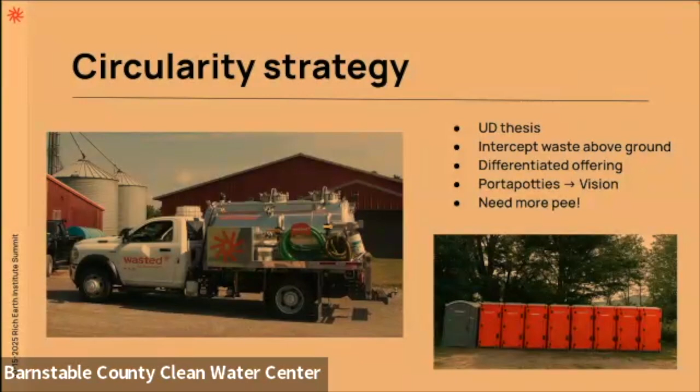We offer toilets that are greener and cleaner than our competitors. So folks choose Wasted because our toilets smell good and are clean, and also because of our mission. We have a sustainable toilet paper. It's bamboo-based, a biodegradable portable toilet additive, that's the blue goo, and we offer reduced carbon emissions due to the flat packing of our modular toilets. So we're scaling to collect pee, and we're now at the point where we need more pee. We're generating revenue from fertilizers, so we need more pee, and that's a great problem to have, which Rachel will speak to a bit more in her presentation.

So we collect most of our pee through these standing urinals in our portable toilets. This was just an idea last year, but it's now become a reality, and we've scaled our portable toilet urinals 5-fold with these new urinals. These are injection molded and they're modular. We can snap them into our existing porta potties with no other modifications, so that makes it very easy to adopt. And these have a one-way valve between the urinal bowl and the tank, preventing smell from flowing back up.

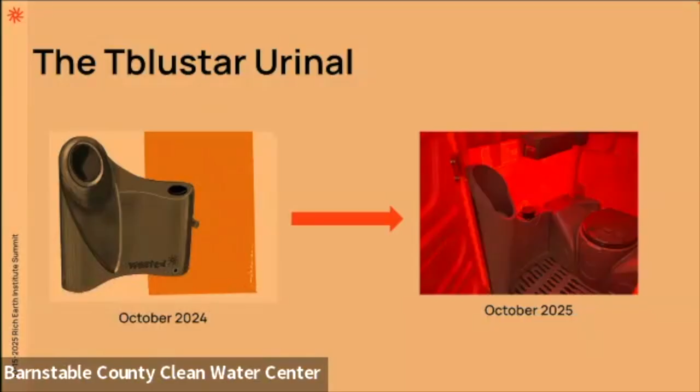And they have about a 7-gallon capacity, which allows us to collect pee over the course of 2 weeks without pumping out. We have previously measured that we collect about 3 gallons per porta potty pump out. So if that rate continues, we can collect 17,000 gallons of pee in Burlington next year and 100,000 gallons in Boston once we're allowed to begin collections in Boston.

So our standardized offering for permanent or semi-permanent fixtures is our donation station. And here we have some stations that were installed at Marino Park in Providence. So these toilets have a dry conveyor belt flush toilet right there. So it's waterless, and it's completely off-grid. It's solar powered. And the good thing about these toilets is that they collect from both standing and sitting peers, whereas the urinals in our porta potties are a bit of a compromise.

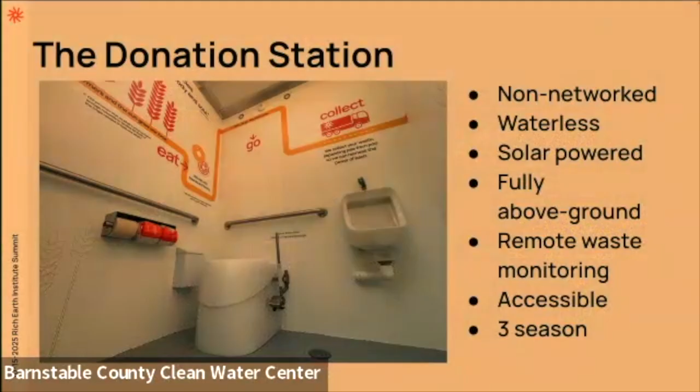This toilet on the ground collects from anyone who stands or sits, no matter how you use the bathroom. This is also, of course, accessible. It's accessible by a wheelchair, and I'd just like to highlight some engineering here because it was a unique challenge. This toilet being accessible by a wheelchair and being built fully above ground had to have some pretty interesting plumbing. Since you all know pee flows downhill, there was nowhere for it to go beneath the toilet. We didn't have much room for a big tank.

So the solution we arrived at was to pipe the pee first into this small tank, then pump it up into a larger tank using a solar-powered pump. This large tank has a 100-gallon capacity, and it has an ultrasonic sensor in the top, so we can measure the volume of waste at any time and only send out our trucks once it needs to be pumped. So with this big tank and the remote monitoring, we're able to more efficiently pump out these toilets as opposed to porta potties, which need to be pumped out every week.

We offer that same conveyor belt toilet for custom settings. If a customer has their own structure or wants their own structure built, we can work with them to install a conveyor belt toilet there. And the benefit here is usually increased collection capacity as well, because more often these pipe to a 250-gallon tote, so we only need to pump that out once or twice a year.

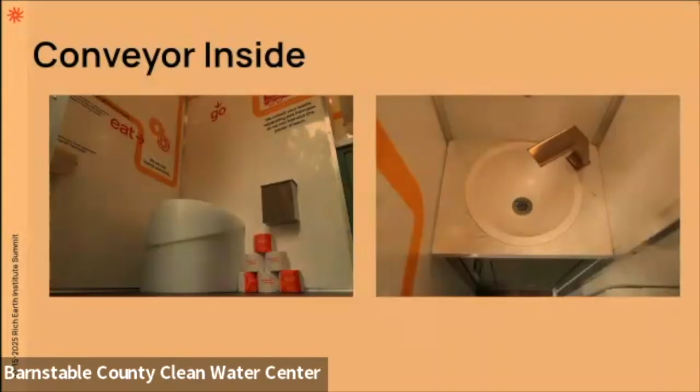So our last method of urine collection is the VIP trailer, and this is a high-end restroom trailer for events like weddings and concerts. This again has the dry conveyor belt toilet and running water, so it's great for settings where people might not want to use a portable toilet.

So all of these toilets are in service of our vision, which is to change the way people think about waste, and we lean into that from a few angles. We have educational graphics in our porta potties and our structures, really letting customers know that we do recover resources from their waste. We also provide customers with impact reports, letting them know the resources saved or diverted by choosing Wasted. And we offer a product with a story.

I didn't really get into it, but we sell WeBloom, which is a liquid nitrogen fertilizer made from the urine we collect. So customers can then buy back their nutrients as WeBloom to use in their gardens, which I think is a great demonstration of circularity. So customers love going with Wasted. They love not only our higher end service and offering, but also our environmental mission. So we're proving that, yes, people outside of our peecycling circle can see urine as a resource.

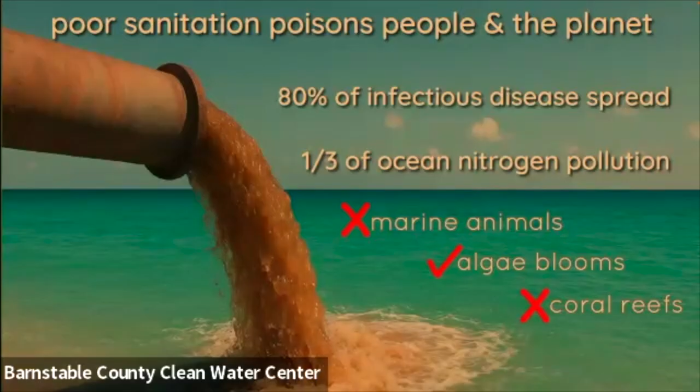So poor sanitation poisons people and the planet, contributing to 80% of infectious disease spread and 1/3 of nitrogen pollution of our coastal waters. And that nitrogen pollution in our oceans contributes to mass die-offs of marine life, fuels huge toxic algae blooms like you are all aware of, and also smothers 2/3 of coral reefs. The other thing that maybe is a hidden problem is that the degradation of this untreated sewage into our environment emits the worst greenhouse gases. So essentially, that includes methane and nitrous oxide, which are respectively 30 and 300 times worse than carbon dioxide.

So to give you sort of what the future looks like, by 2030, more than 2/3 of us are going to be living in urban or coastal communities. These are densely populated communities, but there isn't going to be a sufficient amount of infrastructure expansion, and we're facing increasing water scarcity. So the reality is that if we look at 2030, 2 billion people living in urban areas, that's 1/3 of city dwellers, are going to have a non-sewered toilet option.

So the reality is, and I think most of you know this, is that sewered sanitation is just not going to be a feasible option for most of the non-sewered communities in the world. And so as a result, it's not a huge surprise that $19 billion per year gets spent on non-sewered sanitation, but none of the current options do a good job of saving our oceans, cleaning our oceans, or curbing greenhouse gas emissions, climate change.

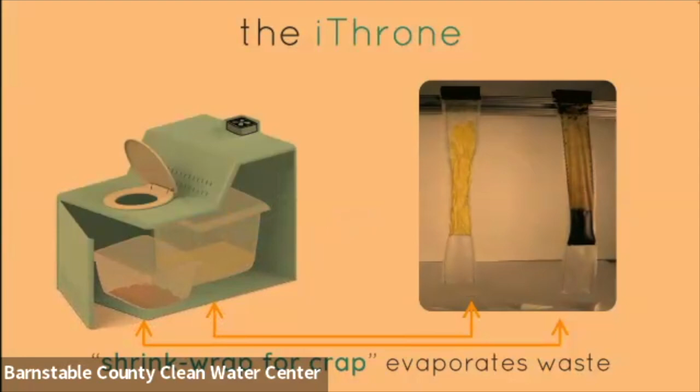And then these bags will quickly soak up the liquid water content of the waste, and by pulling it through the membrane, convert that liquid water into pure molecular water vapor. So essentially, that's like evaporating waste, but without needing heat to do so. So the effect of that is that we can make 95% of collected waste disappear in just one day. By dehydrating the waste so rapidly, we cut off the microbial conversion of that sewage into greenhouse gases, and we can use those dried, separated waste streams.

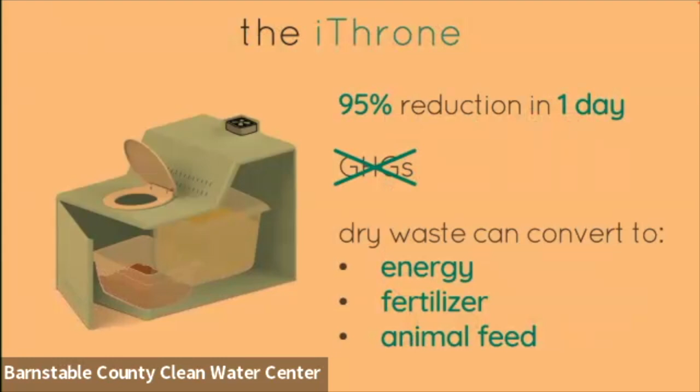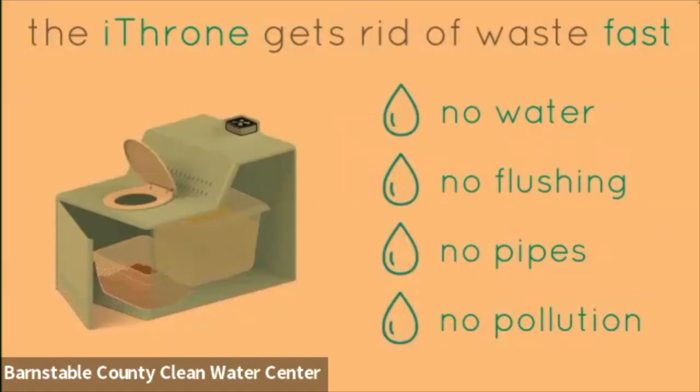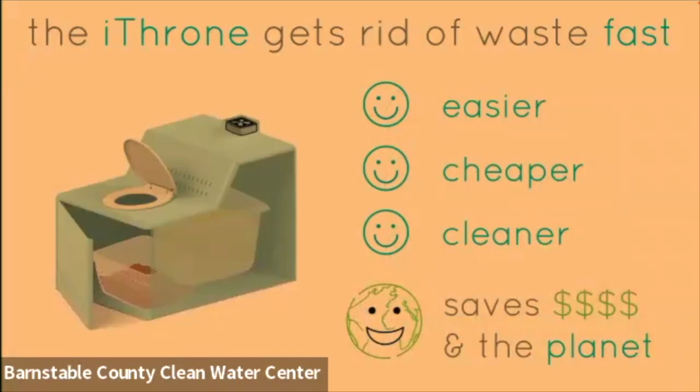They can either be composted or converted into bioenergy, biofertilizer, or other organic outputs, which is, I think, what you all are interested in. So basically, the iThrone is a toilet that gets rid of waste fast, but without water, flushing, pipes or pollution. The only thing that comes out of the iThrone is pure molecular water vapor. Because we don't need a hookup to existing infrastructure, that makes the iThrone easier and cheaper to install and service, and generally just cleaner for the planet.

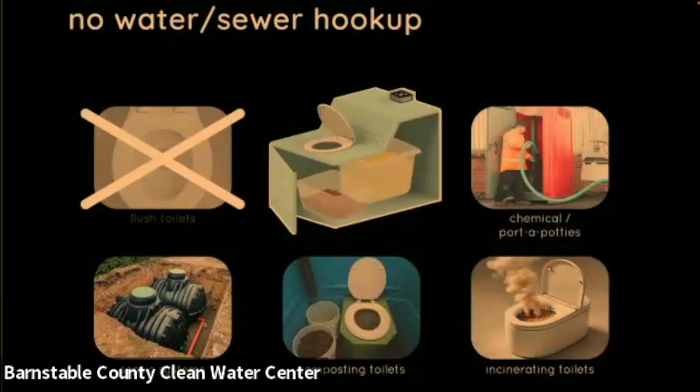So if you're looking at how the iThrone compares to existing alternatives, it checks off all the boxes for waterless, sewerless, zero discharge, low cost, low maintenance toilets, and it's literally the only toilet that makes waste disappear. So the intended uses are for compact drop-in sanitation in non-sewered urban areas, as a zero discharge septic alternative for coastal communities, for emergency sanitation, and for water-saving sanitation in dry regions.

We've run 2 pilots over 2 years, serving greater than 16,000 uses, and what we've been able to show with those pilots is that the iThrone has achieved a 97% elimination of collected waste. We can run them 100% off-grid because solar is sufficient for the power consumption. It's really just running a fan. They're 5 to 300 times cheaper to install than comparables or alternatives, and they're 30 to 100 times cheaper to service.

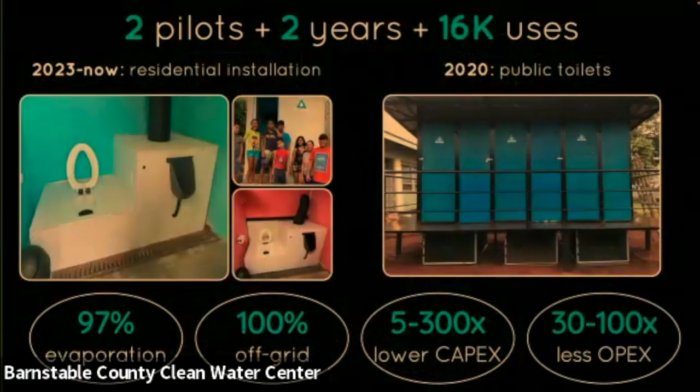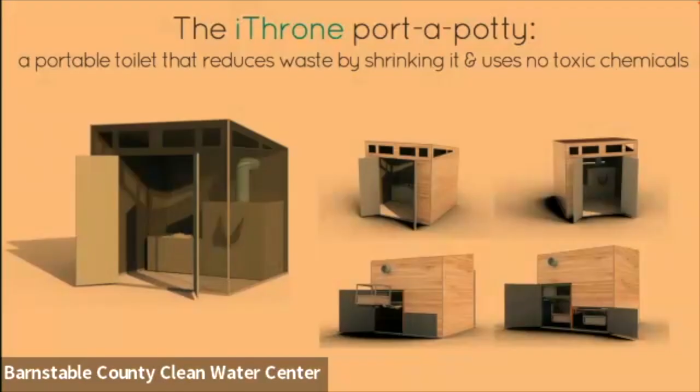So when you think of the iThrone in terms of its impact, just one iThrone, just in a year, has the ability to reduce disease exposure for a community of 1,000 people, conserves 1,000 bathtubs worth of water per year, eliminates 24 bathtubs worth of sewage, and avoids GHG emissions equivalent to the burning of 125,000 pounds of coal. That's just one iThrone.

So we're currently working on a deployment of up to 100 iThrone porta potties for the city of Santa Fe, New Mexico. They found us on a random Google search, which was a great email to get during my Christmas break. They were looking for a drop-in sanitation solution to accompany the build-out of 100 tiny homes that they're going to use for transitional housing for the homeless. And they couldn't figure out how to not blow up their budget by a factor of 1,000 and extend their timeline to permitting by at least 2 years if they had to get a water septic permit system for each of those houses.

So they reached out to us, and we hadn't had a porta potty version of the toilet. We'd had the installed versions in Panama and the sort of quasi-septic version in Uganda, but we redesigned the iThrone to fit into a porta potty. And so we've actually got one of these units that by the end of this week should be running over in Greentown Labs in Somerville.

If you ever find yourself in Somerville, we have a climate chamber where we can mimic the different environmental conditions. So that's kind of our next frontier. We have a team that combines 50 years experience in clean tech and hardware engineering, sales and marketing, venture investing, and international development. And we all have a joint mission to get safe and sustainable sanitation to more people in more places at lower cost.

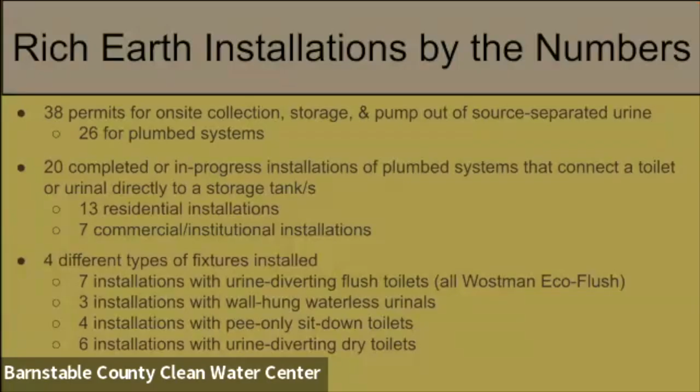And then we've done a bunch of different kinds of fixtures. So some of them are urine diverting flush toilets. Some of them are wall-hung waterless urinals. We have some that are pee-only toilets, basically like a sit-down urinal kind of thing. We saw some pictures of some of those earlier. And then some that are urine diverting dry toilets or composting toilets.

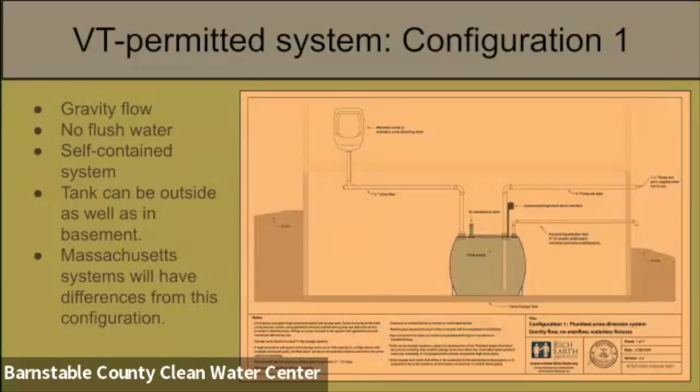You've seen this a couple times before today. To just point out, this is what we're working with in Vermont. This is our simplest version that we're working with that's approved. It doesn't have any overflow. It's not designed to be with a flush fixture. It's really just a toilet piped to a tank with a pump out port and a vent. It has a high level alarm, and it has some things that are not allowed in Massachusetts, like air admittance valves. So that wouldn't be in any systems in Massachusetts.

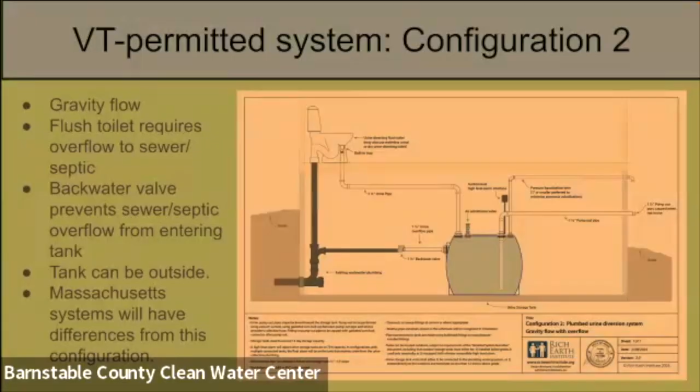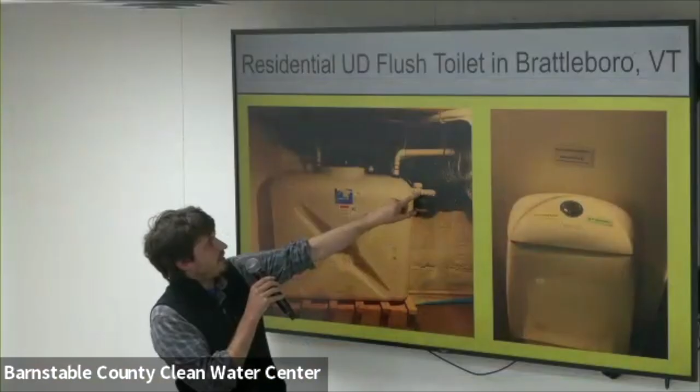So here's a picture of one we did recently. I'll just take this. Here we have our, I can't remember actually, the in-feed pipe and the vent are these two. We have our overflow to the sewer here. This is our one-way valve so that nothing can go back this way. And we have our pump out port coming out this way and out this side of the building there.

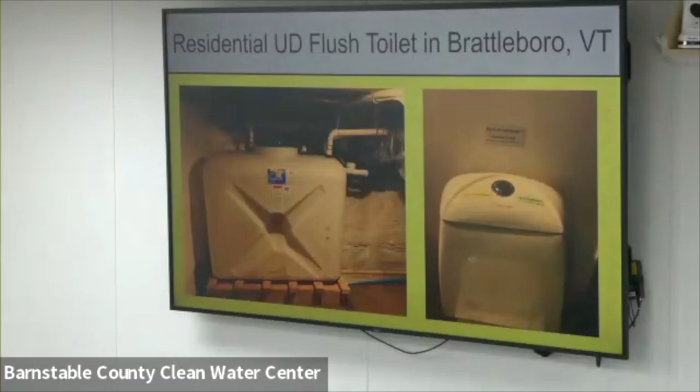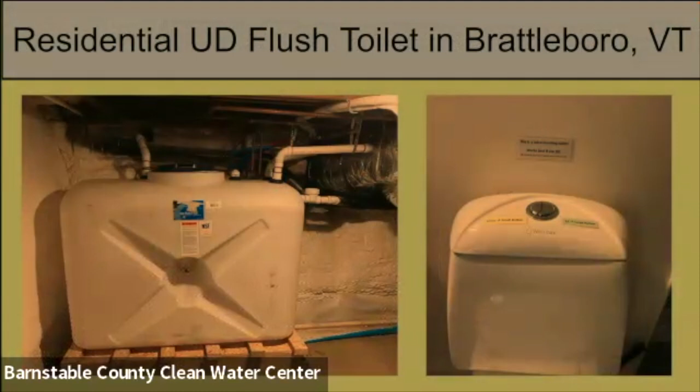One of the biggest constraints that we have with doing these is what kind of tank can we fit in someone's basement? Mostly, what kind of tank can we fit through their door or through their bulkhead? So these doorway tanks are really great for that because they are skinny. And because of their shape, they can hold a lot of liquid. This one is a urine diverting flush toilet. Someone put some of their own signs on, which was nice. They sent me this picture.

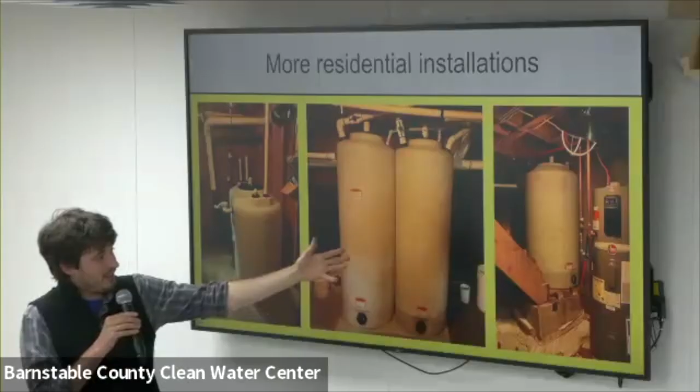Here's just a bunch of other pictures of various scenarios. We have another doorway tank over here. Sometimes, this person had a really skinny door, so we had to fit 2 tanks, so I have this kind of system to be able to pump out the 2 tanks separately. Also, many of our basements, probably many of you have basements, don't have a lot of space left. So the only space that we could put a tank in this basement was on this old stair foundation that was no longer being used. So anyway, we have to get a little creative sometimes, which is kind of fun, if frustrating at times.

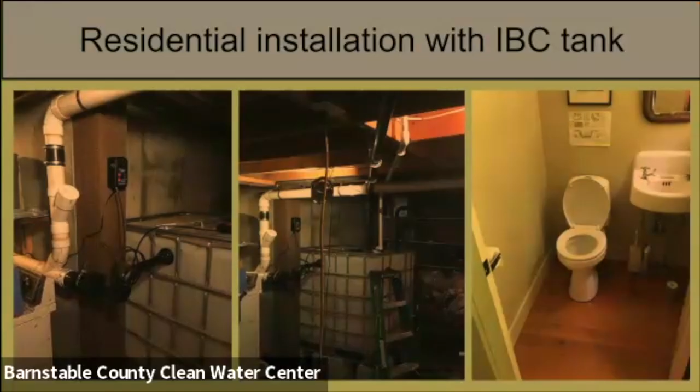When I can, we like to use IBC tanks. They have a lot of volume. They obviously are harder to fit in many basements because of their square cubic shape, but they're also often readily available and cheaper, which is nice.

This is another urine diverting flush toilet installation, so you can kind of see it in situ in the bathroom. This was one of the first ones we did. I think Connor was involved in this one for the permitting process.

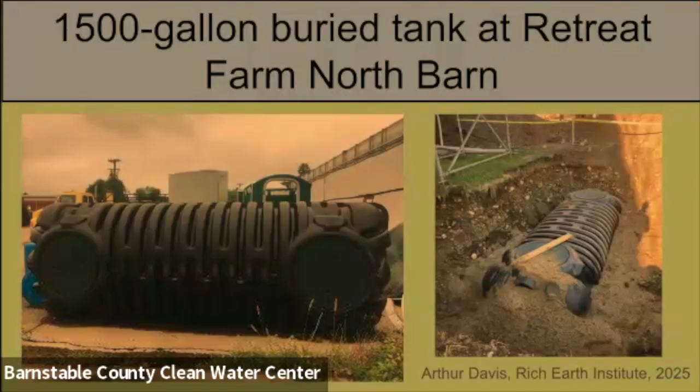So it's a 1,500-gallon tank, and this is really our only one that's a big, fully buried system. But it's really neat because for them, it didn't really change anything. It doesn't change anything about the users of the bathroom. No one has to do any other thinking, and yet they're collecting a lot of pee. I actually checked it the other day, and it's pretty darn full. So it needs to be pumped out before winter for sure. But anyway, that's all I got, if there are any questions.

Oh, yeah. The question was, do we have the capacity to process all of this pee? Yeah, is the short answer. Our pasteurizer that we're working with from Brightwater Tools does about 150 gallons a day. So you can do that math out. But we're currently doing maybe 14,000 gallons a year. At 150 gallons a day, we have plenty of room for expansion there, and the farmers as well to receive. And especially now that we're concentrating some of it, we're able to diversify the end use a little bit because of that. I saw another hand somewhere.